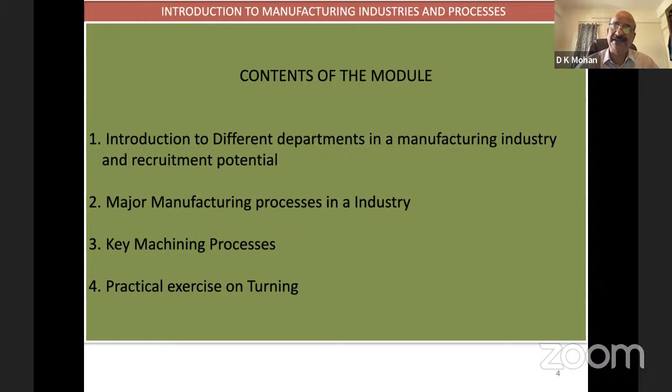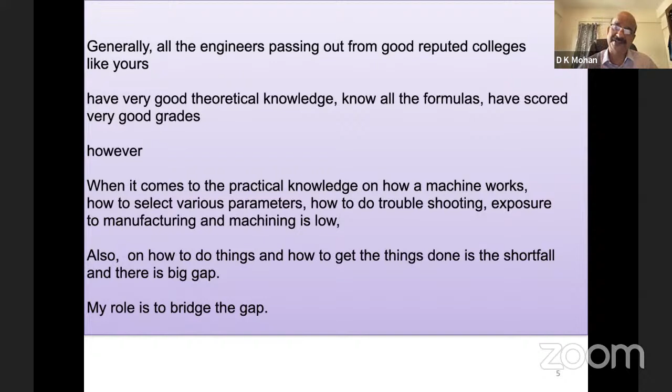So what we have seen is there's a big gap between the theoretical knowledge and the practical knowledge required by the industries. If you fill the gap, your career is made. If you don't fill the gap, you are nowhere, you are targeting a 10 to 12,000 rupees job.

So when you look at the manufacturing industry, in this introductory module, I just want to make you aware that there are different departments: purchase department, manufacturing. In manufacturing, you have planning, production, quality, maintenance, design, sales or marketing. Sales is different, marketing is different. You have national manager, regional manager, branch managers, finance, corporate office. So as an engineer, you can be recruited in any of these except finance and corporate.

So a purchase department requires engineers, planning requires engineers, production requires engineers, quality, maintenance, design. I've shown you a ladder. The ladder says that you can join as a junior engineer or a graduate engineer trainee and then promote yourself to assistant manager, manager, regional manager. And the final target is CEO or director of a company. So all these are possible if your first step is the correct step, that is skill development.

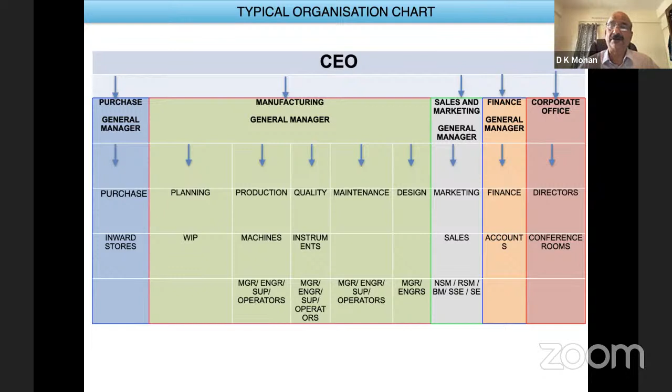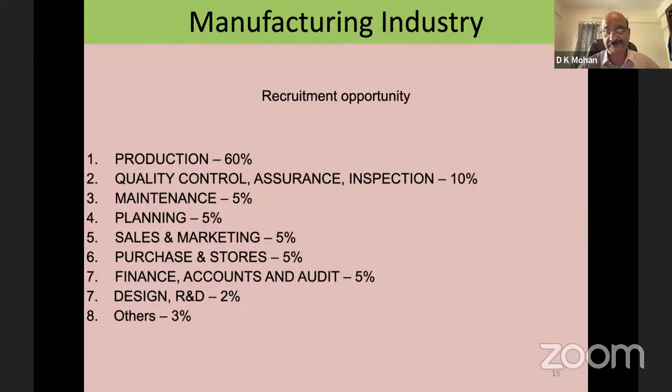We'll go through all the different departments when we go through the actual module. Sales and marketing is also a very good career. Recruitment opportunity in production is 60%, direct production and manufacturing. Quality control may be 10%, planning is 5%, sales and marketing you may have 5% people, design around 2%. Design is a very attractive subject for most students I've seen, but today with so much automation and software being applied, the number of actual design engineers is reducing. But you can select a career of your choice.

I'll also introduce you in this session to the various manufacturing processes. Any company first has to have a raw material, it does some operations and comes out with a finished product. So we have companies which are into machining, forging, rolling, extrusion, casting, metal sheet forming, electric discharge machining, pressing and stamping. You must have heard some of these words in your college, but we have to know much deeper why rolling is done, can any type of material be forged.

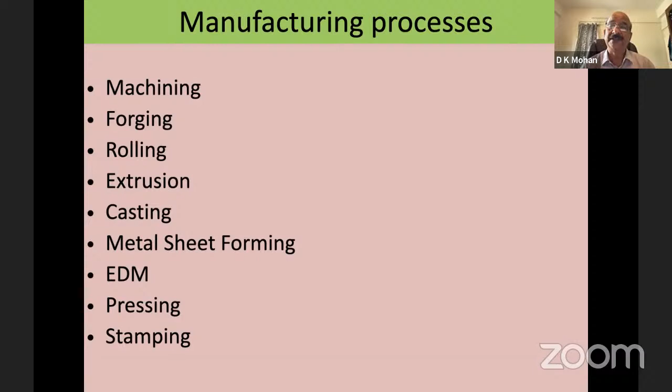What is the requirement for material to undergo casting? When is electrical discharge machining used? This knowledge is more or less mandatory if you are in a manufacturing setup. You may be in design, you may be in quality, you may be in production, but this knowledge is required. So we will discuss these modules in much more detail and why different manufacturing processes are adopted for different companies.

So the next important thing I'm going to teach you is machining processes. What are the different machining processes? If you enter any machine shop, first is a bandsaw machine where you do metal cutting. Then you have a setup of CNC and conventional machining, CNC turning, CNC milling, CNC drilling, special purpose machines, copying lathes. So there are so many different types of machines used for converting raw material into a finished product.

All these are called subtractive machining. You must have heard the word additive manufacturing is entering India at a very good speed. In additive manufacturing, you're adding the material by a CAD program, and from the base you start and build up the material by adding. So there is no wastage, it's an addition. In metal cutting, which has been happening for many years, it's called subtractive machining.

Because what happens is, I've got a 60 dia job, 60 dia round job, say 150 long. I want to remove material and bring a shape. My final product may be 40 dia, it may have some threading, it may have some grooving. So this is called subtractive machining, where you're removing the material.